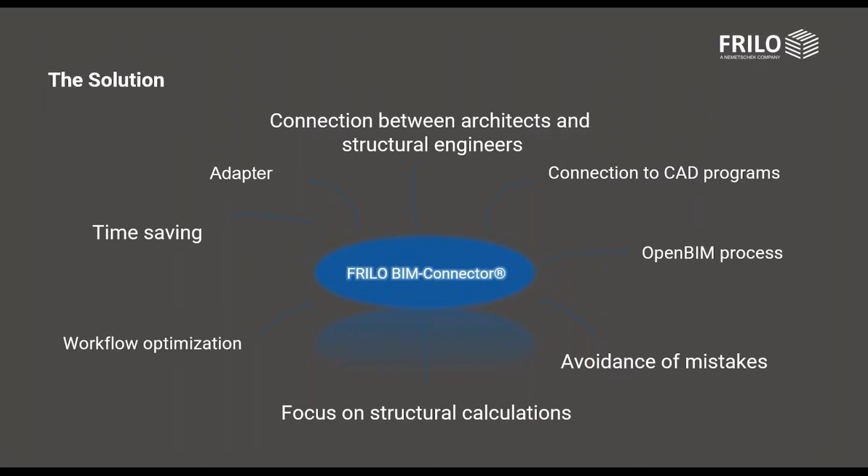So how does it work? The BIM-Connector is, in principle, an entry point for physical and analytical building models coming from architects or 3D engineering solutions into the FRILO application environment. As I mentioned, it supports IFC and SAF file formats. Let me tell you a few words about these two file formats.

The first is IFC, the Industry Foundation Classes. It's an object-based file format with a data model developed by Building Smart Alliance to facilitate interoperability in the AEC—architecture, engineering and construction—industry. It's a collaboration format commonly used in building information modeling based projects. The model specification is open and available to everybody, and it is currently very widely used in 3D CAD solutions.

The other model type is the Structural Analysis Format, SAF. In this format, we get analytical models from architects or other engineering solutions. It is an Excel-based open source format developed and optimized especially for storing and sharing structural analytical model data between modelers and analysis software.

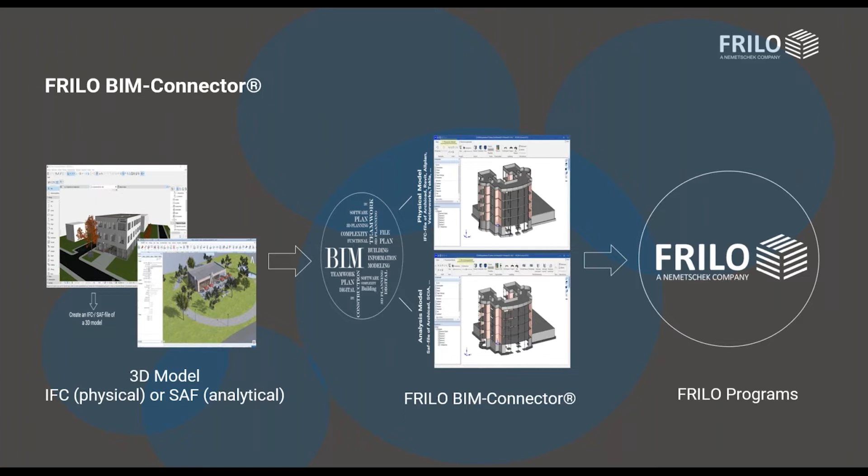So which FRILO calculation programs are connected right now? At the moment, you can pick one slab from your model in the FRILO BIM-Connector and hand it over to the Slabs by Finite Elements, PLT, program of FRILO. Another possibility is to select an individual reinforced concrete column and hand it over to B5, the reinforced concrete column program of FRILO. The last and most comprehensive possibility is to select the entire model—in fact, you don't even need to select it.

You just press the export button, which you will see shortly in a demo video I brought for you, and export the entire building model from the FRILO BIM-Connector into the FRILO building model program, called GEO building model. In this program, you can distribute vertical loads, and of course also apply external loads like wind, snow, or earthquake loads, distributing them vertically to the individual building components. After that, the building components with their assigned loads can be handed over to the FRILO individual calculation programs for element design. So this building model opens the door to the entire FRILO application environment.

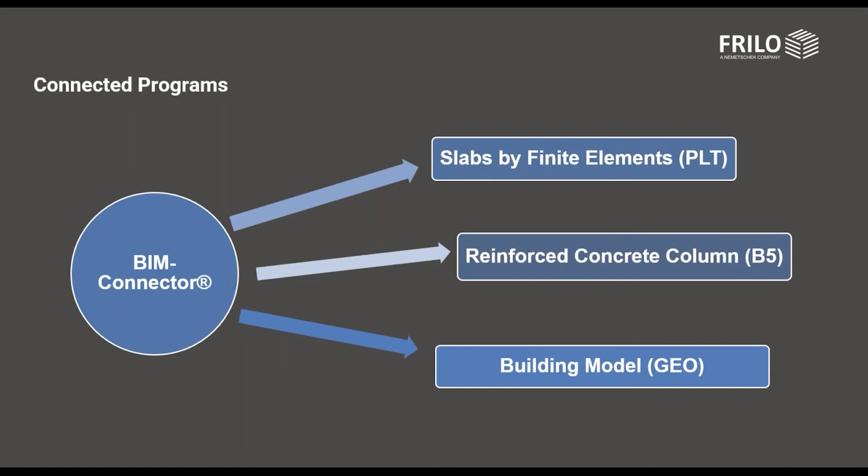Now we have come to the point where I will show you a short video of how you can work with FRILO BIM-Connector and an IFC file that, in this case, we are getting from an Archicad architect, using the Archicad solution from Graphisoft. Let's start and see how it works.

I'm starting the FRILO BIM-Connector. It is in my favorites in the FRILO application environment. As you can see, first I have some initial steps described for how to prepare my IFC file so it can be imported in the best way. Then I select the file itself and open it in the FRILO BIM-Connector.

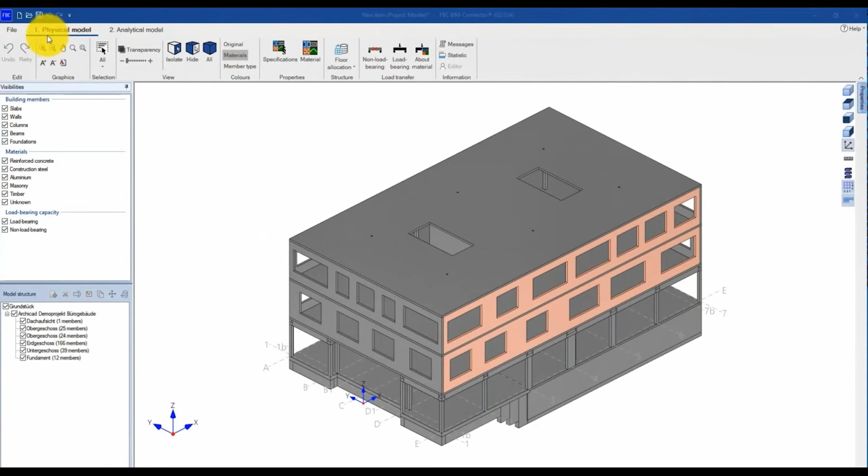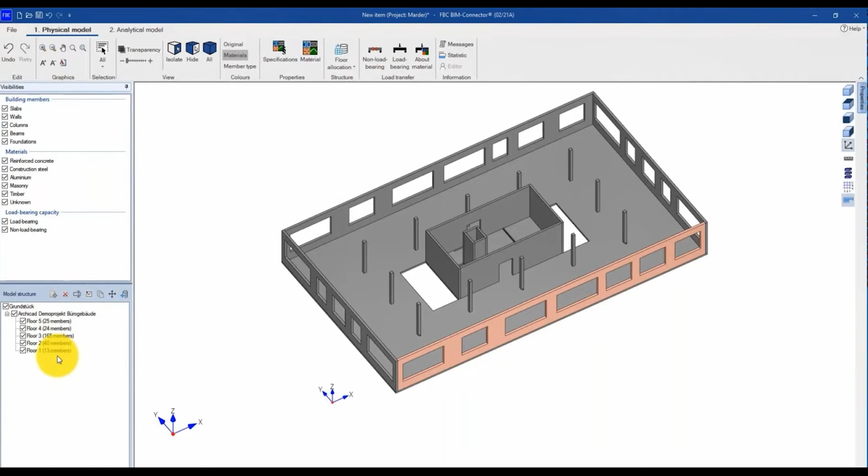Now we have landed in the physical model view. As you can see, models coming from architects mostly have this top-down structure, which is not common for structural analysis and design. This is why I first have to reassign the floors so that we have a bottom-up structure, the one relevant for structural analysis. It is very easy to do with the floor allocation function, and I can convert my building floor by floor into the bottom-up view.

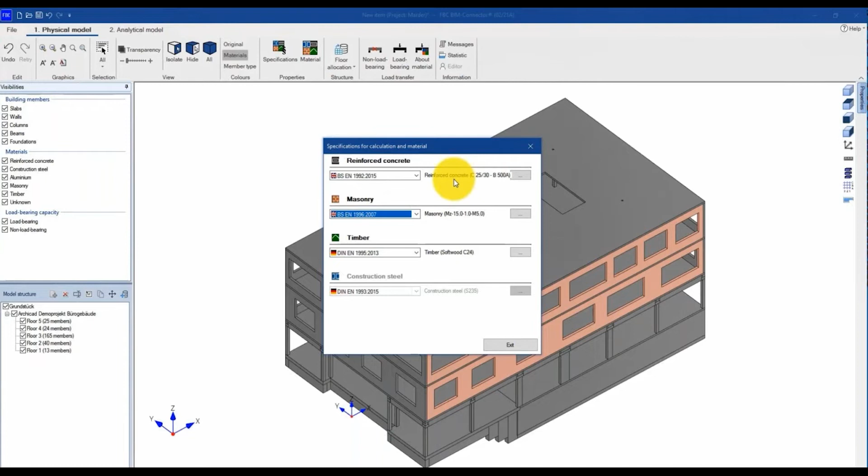As a next step, we can assign the material quality. As you can see, the materials themselves are already there. This gray material is the reinforced concrete, and the red one is the masonry. They have been taken from the IFC file from our architect, but we still need to add the material quality. This can be done with the specification function in the top menu bar, where you select the individual material quality for each material used in our building—for example, masonry quality and reinforced concrete quality in our case.

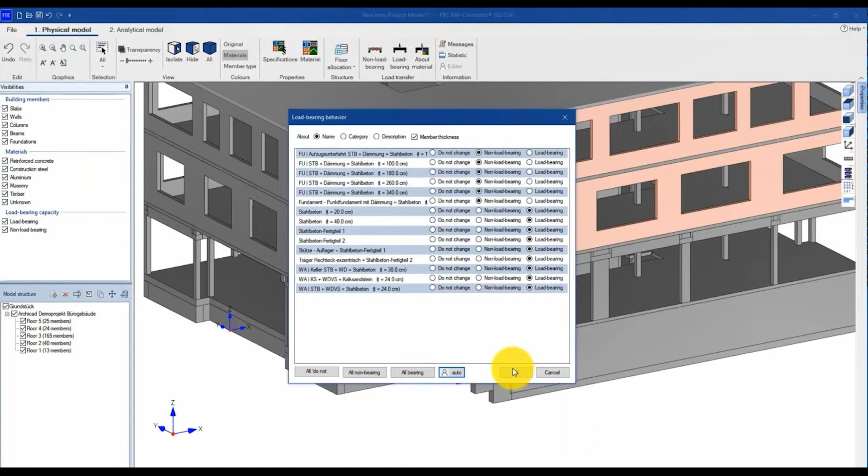What can we do next? We can also automatically remove the non-load bearing components from our building, using the load transfer via material button. The small thicknesses as well as the names of the components containing certain words are analyzed—let me stop for a moment to explain. For example, the isolation layer can be filtered out automatically because it has the word 'isolation' in the name, or 'Dämmung' in the German case, as you saw in the video. Both English and German wording are supported in the program.

Another way to find non-load bearing components is to analyze the thicknesses, which is built into the program's functionality. Based on those thicknesses, most of the non-load bearing elements have already been converted into this transparent view, meaning they will not be considered when converting the physical model into the analytical model. If some have been overlooked by this automated functionality, we can still convert them manually, as I do here in the video.

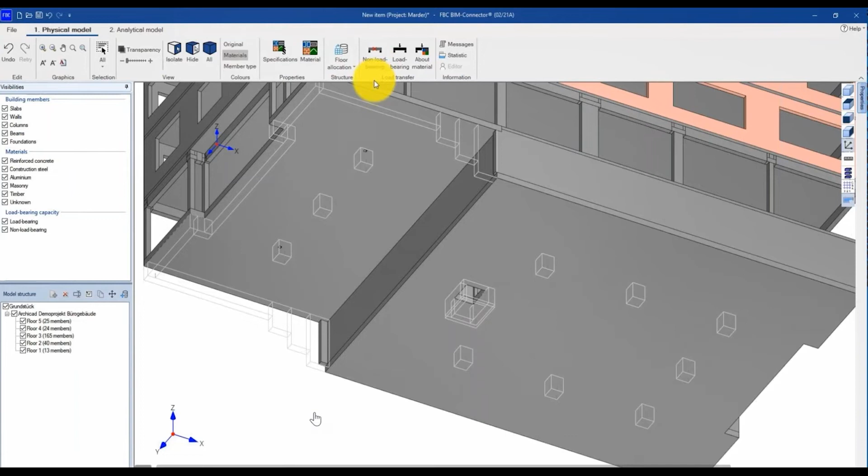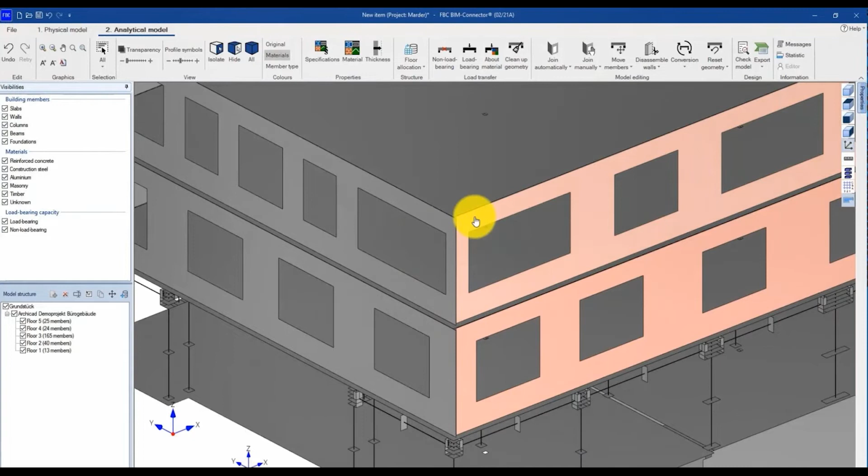Now we can switch to the analytical model—if I switch the step at the top, I'm converting the entire model into the analytical model. The non-load bearing components have disappeared, but if I go back to the physical view, I will see them again. We can see that the components are not connected yet, because they are reduced to their mid-surfaces and axes in the case of columns or beams, and they are not on the same level after converting from physical to analytical model.

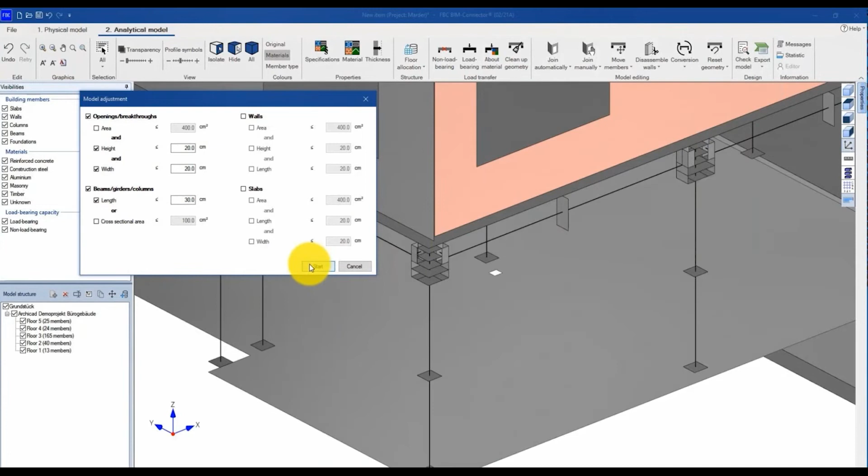Before joining the components, I can also see some small openings, corbels, and notches that don't belong in the structural or analytical model. I'd like to clean up the geometry by entering the respective dimensions, so that small walls, columns, beam and column sections, and slabs will be automatically removed from the model. You see there are many such situations in my current model, displayed in this long list in the table. I can press Control-A to mark all of them, display them on screen, and then clean them up automatically wherever they have been identified.

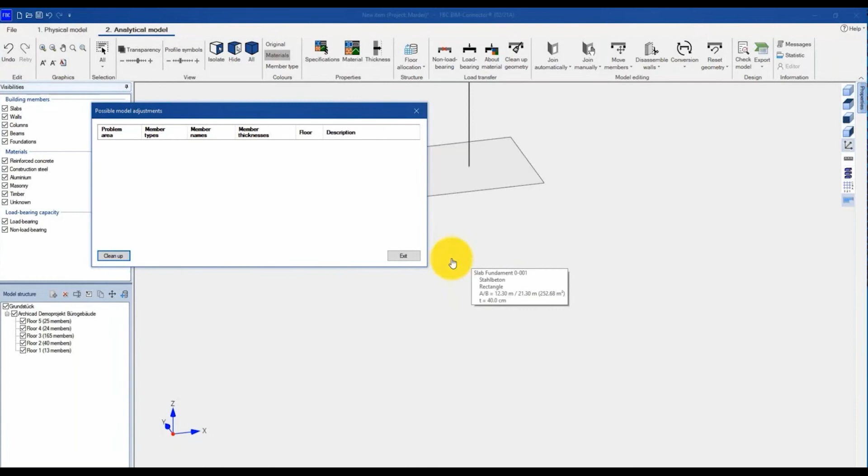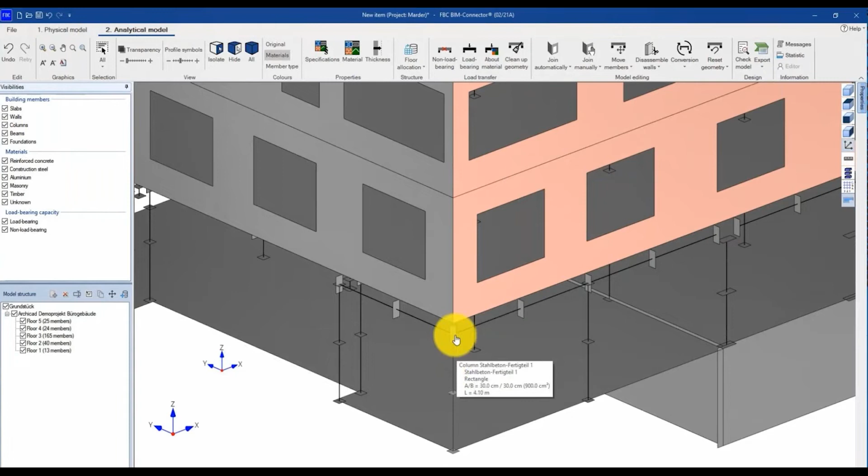Now, after cleaning up my geometry, I can see there is a need to join the elements, so we will join them automatically first. As you see, the walls are already matching each other, and also beams and columns—but there are certain areas where they have not been connected yet.

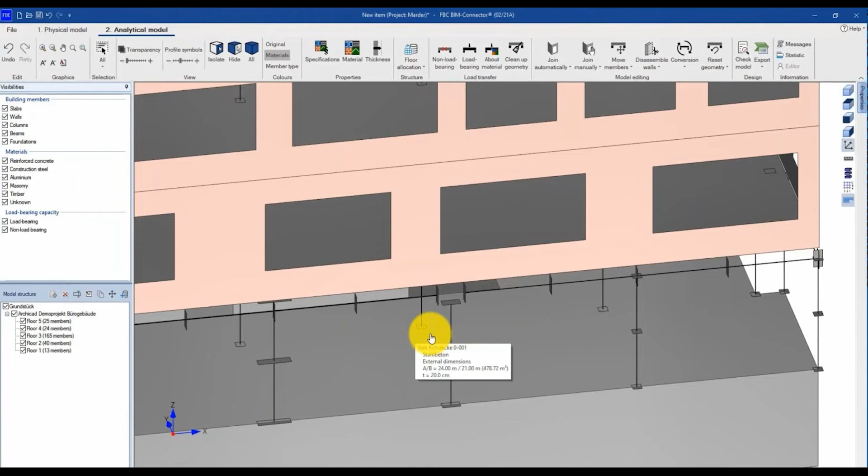And this can be done manually in the next step. Maybe I can make a short comment on why they have not been connected. There are certain preset distances between building components that are considered while connecting or joining the components automatically. If the distance is too large, it cannot happen automatically, and we still need to control those areas and join them manually. Of course, it's also easily done with the help of this join manually function.

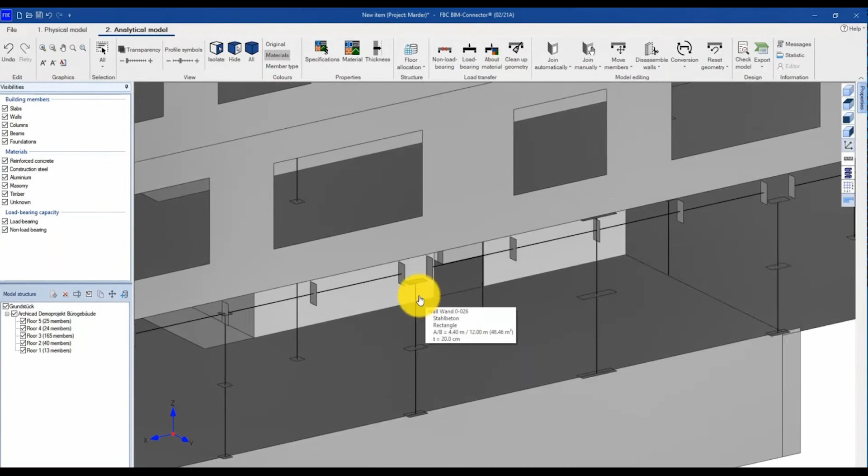So I have to repeat this in all of the sections where the column is not connected with the beams and the beams are not joined. I am marking the first elements, then the second elements, which will be extended to the first one selected. Good, one more left. So first marking the beams, then the column, and extend the column to the beams.

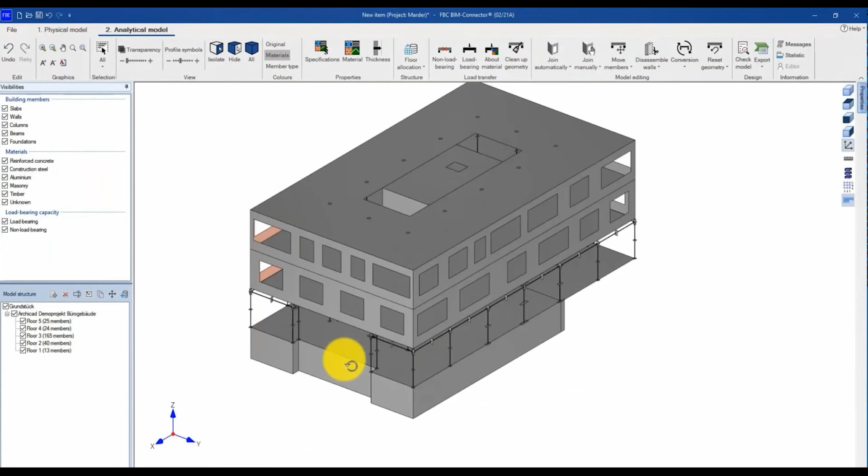Very well, now we can see that the model looks very good. We still need to connect the two slabs at the bottom, because the program we would like to hand everything over to supports only one slab per floor. So it has been connected now, or is being connected.

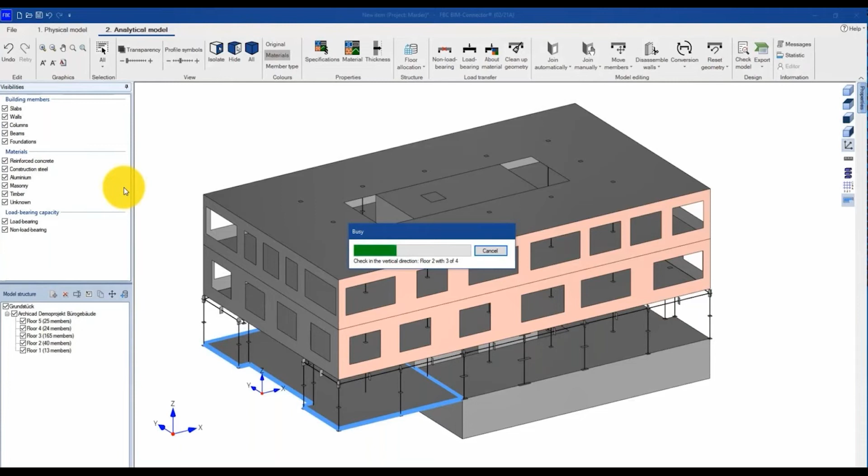Exactly, and what I need to do before I transfer it is make the final model check. It is checking the exact positioning of the members, if they are positioned exactly over each other, the middle axis and the middle surfaces of the walls. It's important to run this check because sometimes the materials have different thicknesses, and you will see right now we have such a situation here.

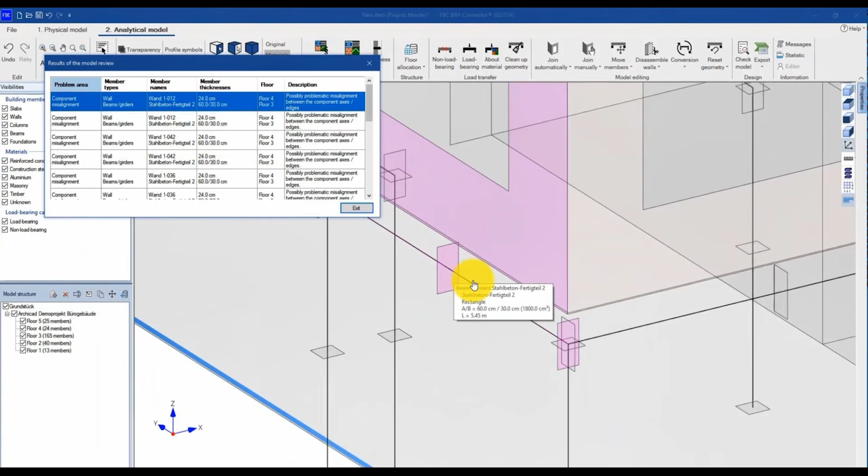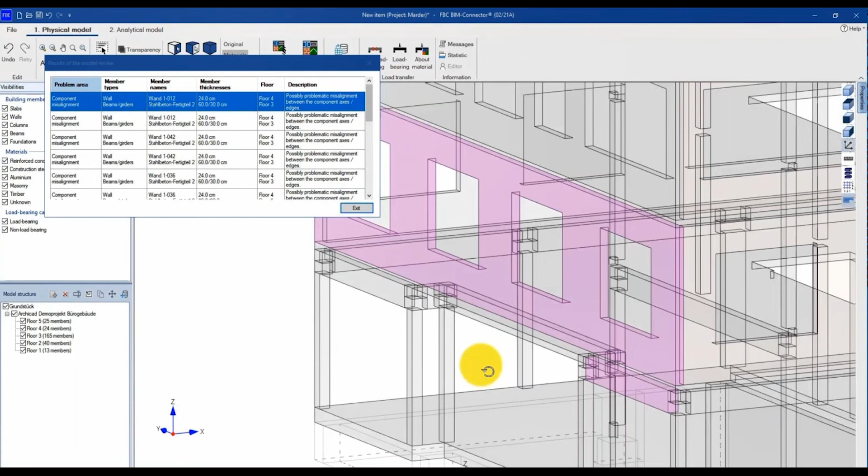If the wall has a different thickness than a beam laying under it, when we reduce them to the middle surfaces, they will not be completely 100% over each other. You see it here in the analytical model view, but we will jump shortly to the physical model view to show you the situation better, where you can see that the wall is literally thinner than the beam, and this is why the middle surfaces and axes are not correctly positioned.

It happens on all four sides of our building, which we can follow in this table of all the situations where the actual position is not correct. So, what can we do in this situation?

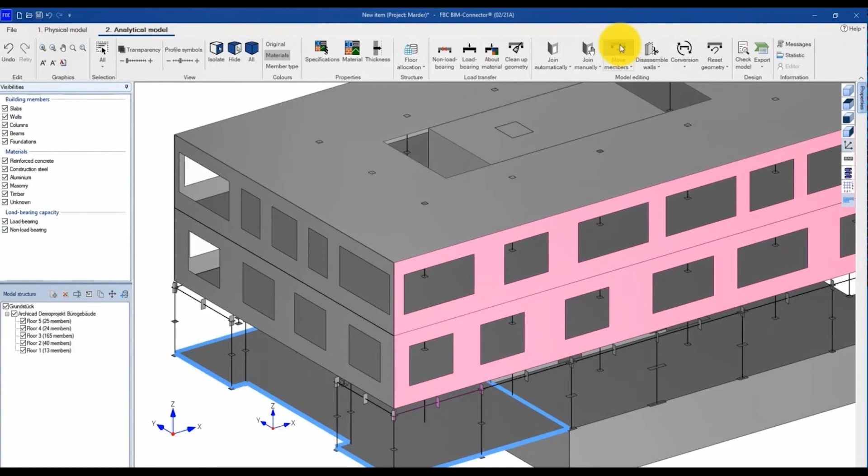We can move the members manually. I decided to move the walls to the beams. So I first mark the walls, then the beam, and then use this function, move members, in the top menu bar. I have to repeat this on all four sides of the building.

Select the wall. After that, you see I need to join automatically again, because if I move the axis, I again need to join the members at these connection parts.

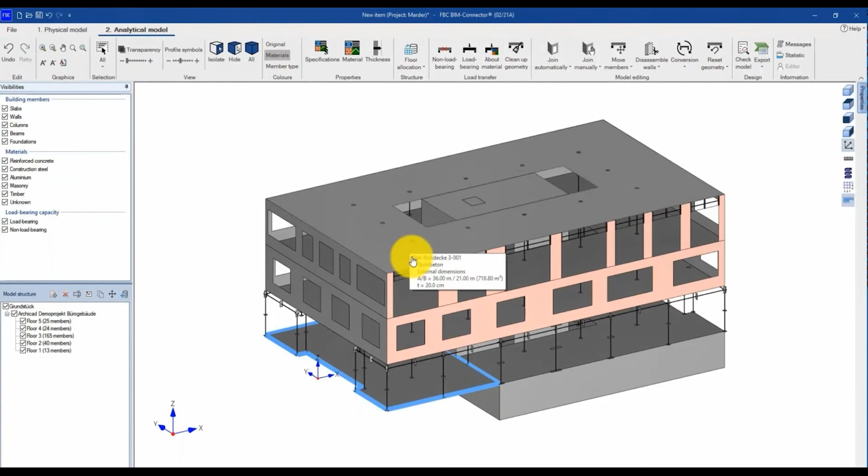The other useful function is to disassemble the walls, or split them into stripes, and to consider the openings in structural analysis and calculation. There are two possibilities: either just split into stripes, or you can convert the lintels into beams, which I have done in this video. So you see they have been converted, the lintels above the openings, into the beams.

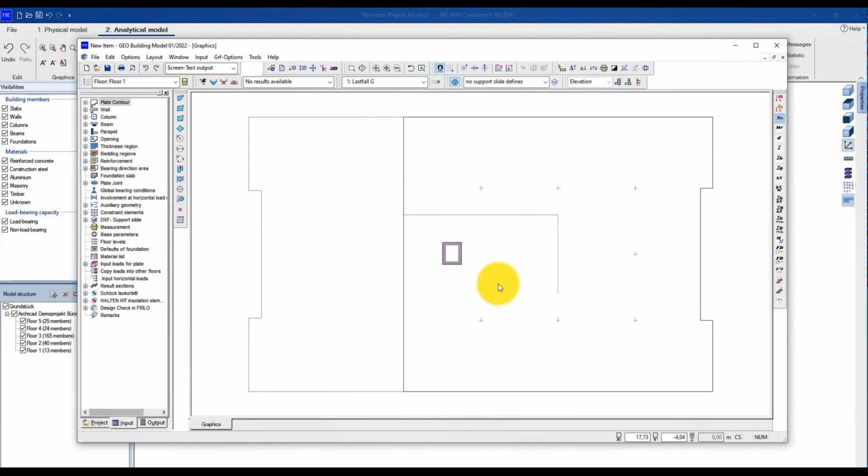Now I can export the entire building into the FRILO building model program. I just selected export and pressed export to building model, and I will control my building in the 3D view first. If everything has been transferred correctly, we can see the openings have been considered, and we have the beams created above the openings. So it looks good, it looks correct.

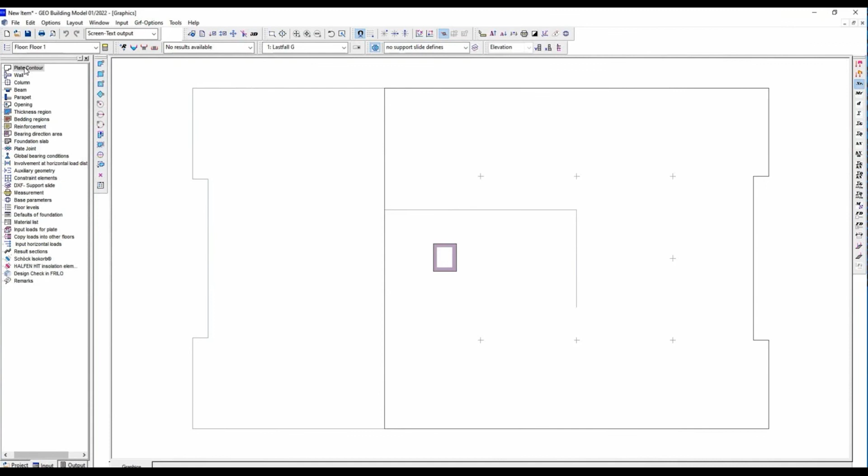So we can now proceed with the building calculation. First, we have to enter the stiffness of our building in the foundation floor and in the part of the ground floor. So first, the stiffness has been entered in the foundation floor, and now we go to the second floor, where we have to select first the part of the slab relevant for the stiffness.

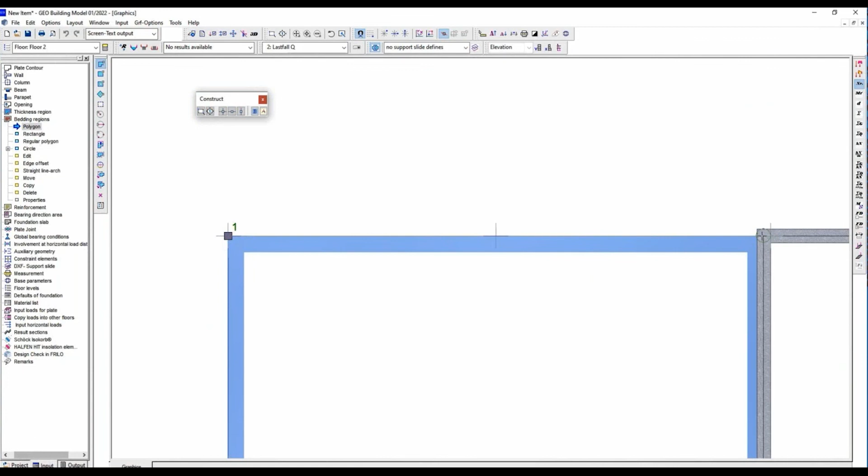You can do it by marking the entire area that is relevant for our stiffness, and after that has been done, we are just applying the stiffness to this area.

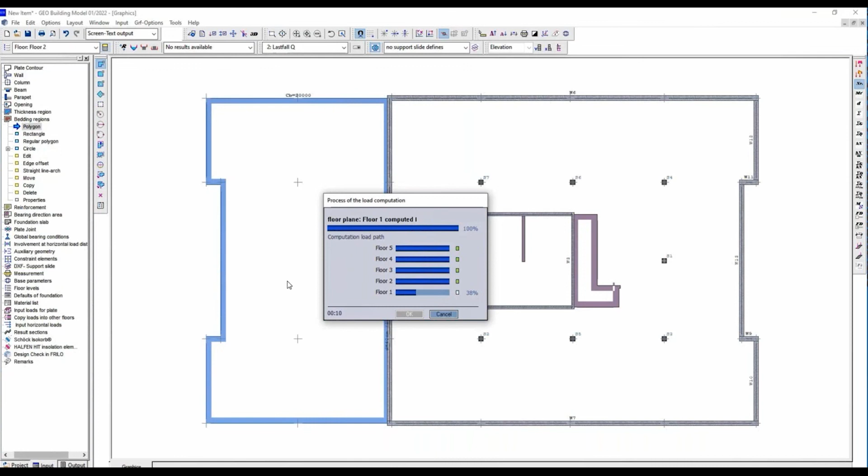Okay, now the building is ready for calculation, and we are pressing the calculator icon, which means calculate. In this moment, the vertical loads, like the self loads, are transferred, which can happen because we have the geometry, the materials, and material quality. After consideration of these parameters and the stiffness, we can distribute the vertical loads in the building, and after it has been done, we have the individual loads assigned to each building component in this building.